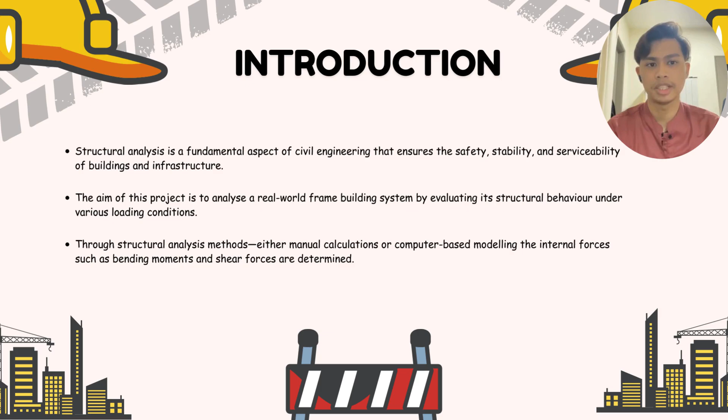For introduction, structural analysis is a fundamental aspect of civil engineering that ensures the safety, stability, and serviceability of buildings and infrastructure. The aim of this project is to analyze a real-world frame building system by evaluating its structural behavior under various loading conditions. Through structural analysis methods, either manual calculation or computer-based modeling, the internal forces such as bending moments and shear forces are determined.

I will continue explaining the objectives for our project. There are four objectives. First is to identify and calculate various types of loads acting on the structure, such as dead load, live load, and lastly environmental load.

Number two, developing a simplified schematic drawing to represent the structure layout, support types, and member geometry. Number three is performing structural analysis to determine internal forces, including maximum bending moments and shear force. Lastly is computing the maximum bending and shear stress based on the internal force results.

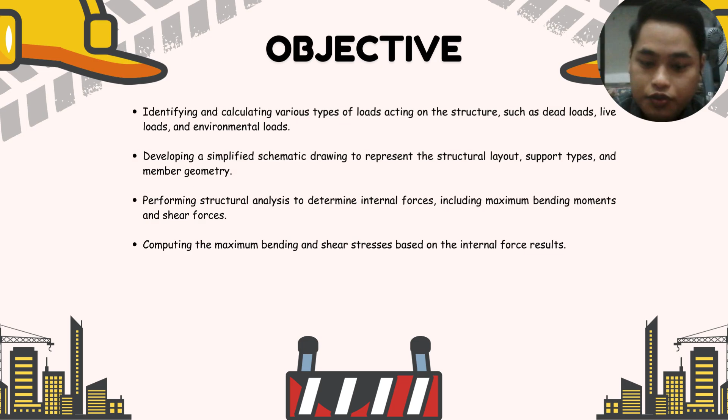Assalamualaikum. I will explain about the building description. The building that we chose is ARKED UTHM, a primary multifunctional commercial and social hub. It is located in Universiti Tun Hussein Onn Malaysia campus in Parit Raja, Johor.

The purpose and location of this building is strategically positioned near residential and academic areas, serving students, staff, and visitors with retail shops, food court, and offices. The structure consists of a 2 to 3 story reinforced concrete frame building designed for dense usage.

The architecture utilizes a minimalist modern style and incorporates natural ventilation, louvered windows, and shaded walkways to manage the tropical climate. The layout prioritizes pedestrian flow and comfort through wide staircases, covered corridors, and dedicated parking.

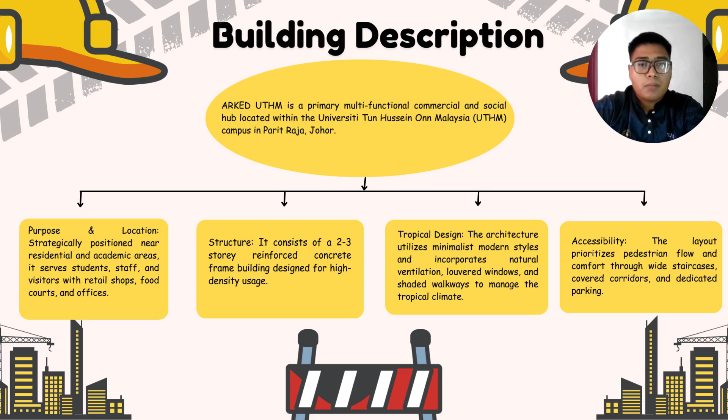Based on the diagram, I have decided to choose beam 1 size. The length of the beam is 4 meters, the height of the beam is 0.3 meters, and the width of the beam is 0.2 meters.

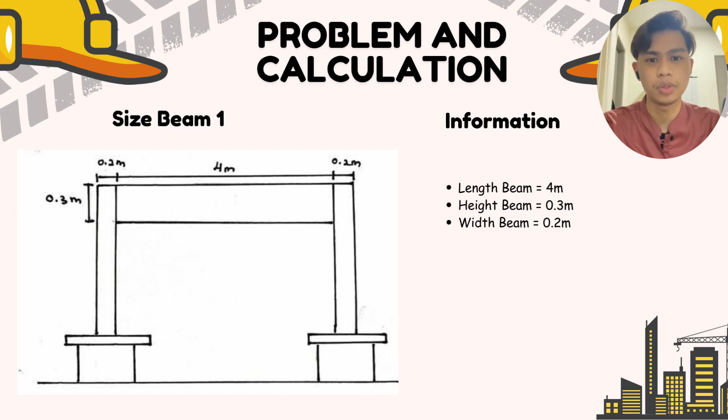Based on that beam, there are 3 load conditions given. The first is the dead load. As you can see, the dead load has 4 components: RC roof slab equals 5.0 kN per meter square, waterproofing which is 0.4, ceiling and services which is 0.3, and finishes and M&E allowance is 0.4. The total of the dead load is 6.1 kN per meter square.

Secondly, the live load is for a non-accessible roof, so the total load is only 0.4 kN per meter square. This is because the beams on top of the roof are used only for services.

And then finally we have the environmental load. There are 2 loads, which are rain and wind load. Both of them are 0.75 and 0.25, equal to 1.05 kN per meter square. So we total up the dead load, live load, and environmental load, and we get 7.5 kN per meter square.

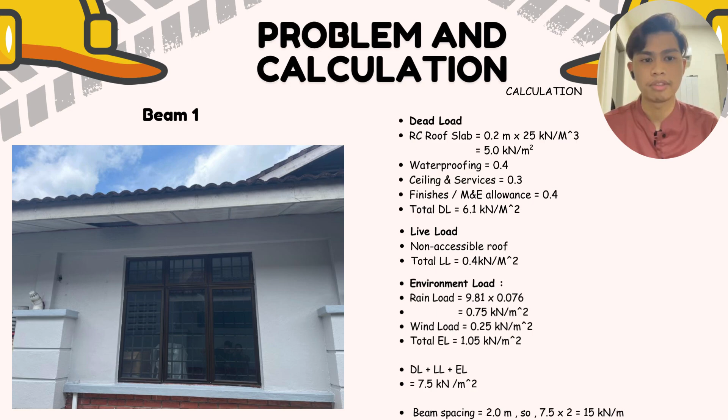This is because the beam spacing is 2.0 meters, so the total of the UDL that we get is 15 kilonewtons per meter.

Firstly, we need to draw a schematic drawing as you can see in the pictures above. After that, we calculate the support reactions.

I choose sum of moments at A equals 0, so 15 kilonewtons per meter multiplied by 4 and multiplied by 4 over 2, and then RBY at distance 4 meters equals 0. That is the equation. After that, we get 120 minus RBY times 4 equals 0, and summing it up, RBY equals 30 kilonewtons.

Secondly, we need to get the forces at Fy to get RAY. So we know RBY is 30 kilonewtons. So what we're going to do is RAY plus RBY, which is 30, minus 15 multiplied by 4 because of the UDL and the distance, equals 0. So RAY minus 30 equals 0, and we get RAY equals 30 kilonewtons.

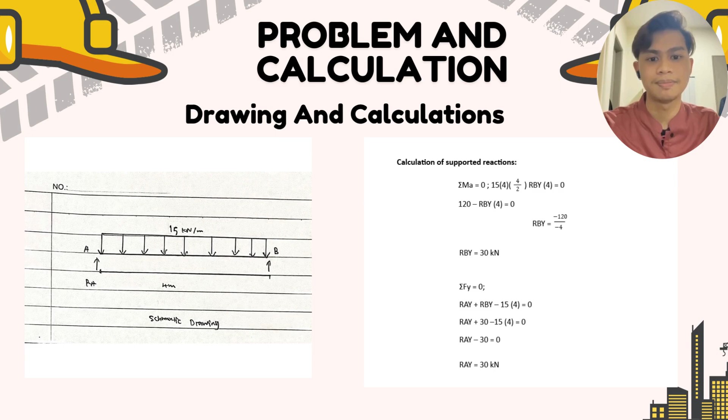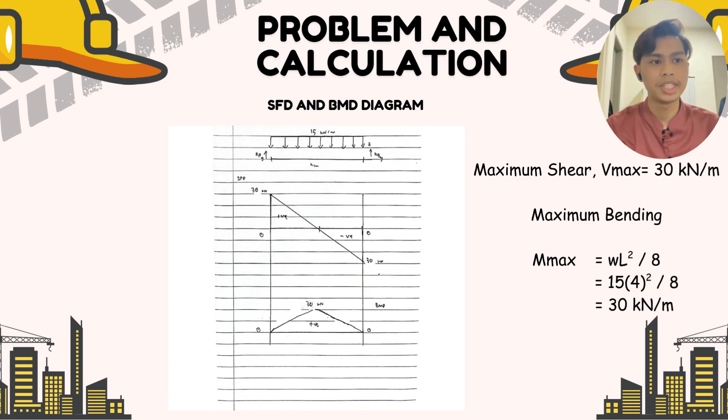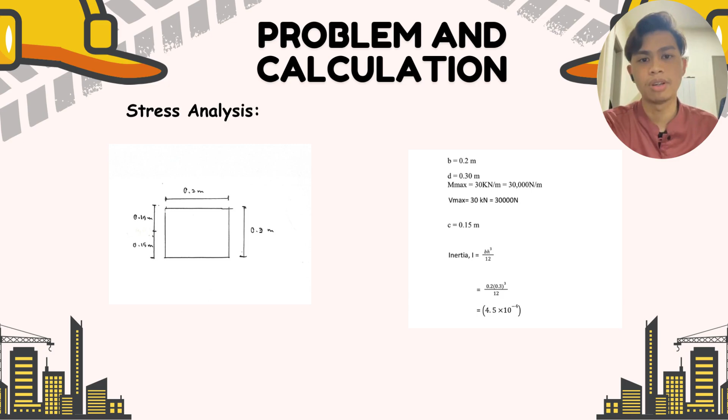After that, we need to sketch a diagram for bending stress distribution. Based on the pictures above, it goes like this. So how do we determine the maximum bending stress? We use the formula MC over I. M equals to our moment, which is 30,000 newtons, multiplied by the C, which is 0.15, divided by the inertia that we just got, which is 4.5 multiplied by 10 to the power of negative 4. And then the value we get is 10 multiplied by 10 to the power of 6 MPa.

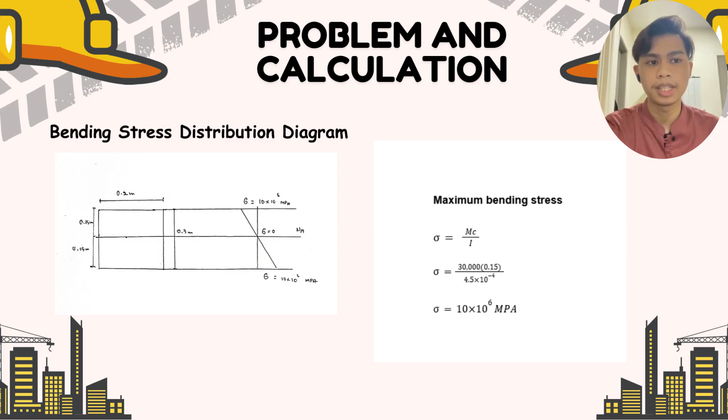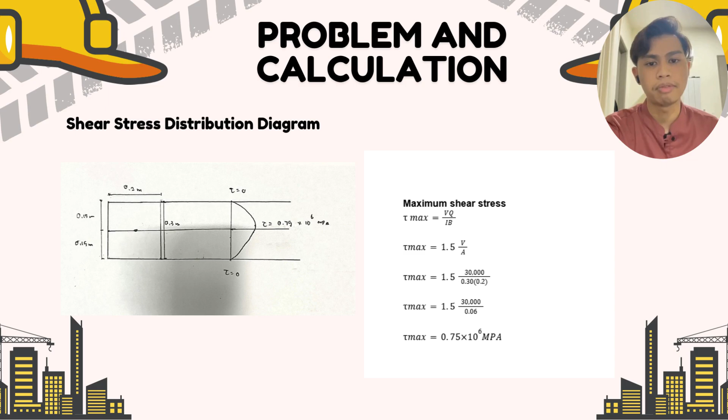Then we also need to sketch a diagram for shear stress distribution. How do we get the tau max for maximum shear stress? The formula is VQ over IB. For tau max we can also use 1.5 V over A. So for the tau max, 1.5 multiplied by 30,000 newtons over area, which is 0.3 multiplied by 0.2. And then we just insert the calculations, and the result we got is 0.75 multiplied by 10 to the power of 6 MPa.

Last but not least, we need to calculate the maximum deflection of the beam. The formula given is 5WL to the power of 4 divided by 384EI. The 5, and then we insert the 15,000, and then multiply by the length of the beam, which is 4, to the power of 4, and then divided by 384E. E is given for the concrete beam, which is 25 multiplied by 10 to the power of 9, and then the I, the inertia, is 4.5 multiplied by 10 to the power of negative 4, and the result we got is 0.004444 meters, and we convert it into millimeters, which is 4.44 millimeters, which is way lower than 11 millimeters.

Why do I say way lower than 11 millimeters? Because for me, the strength of the structure of the building is very good, because if the value that we get exceeds 11 millimeters, then with the maximum deflection of the beam we can see the crack of the beam.

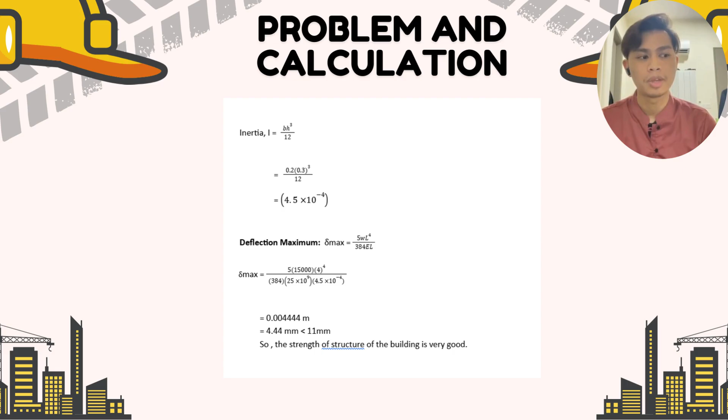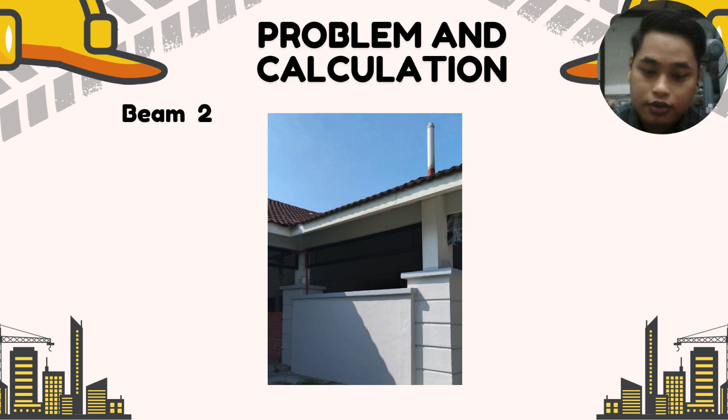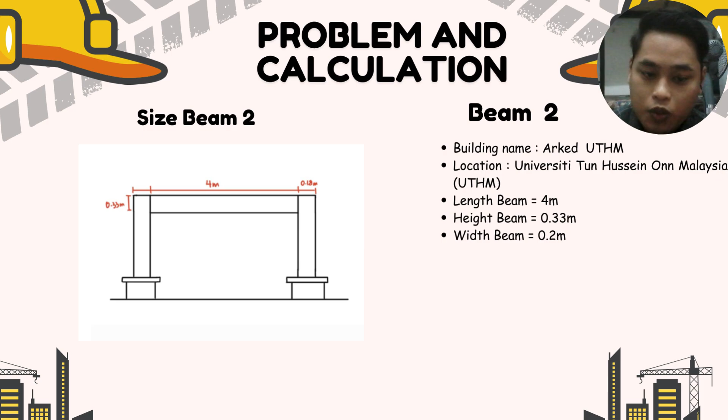This is an image of the beam that I have selected at Arked UTHM to calculate. Okay, this is the size of the beam that I have chosen. The length of the beam is 4 meters. Height of the beam is 0.33 meters. Width of beam is 0.2 meters.

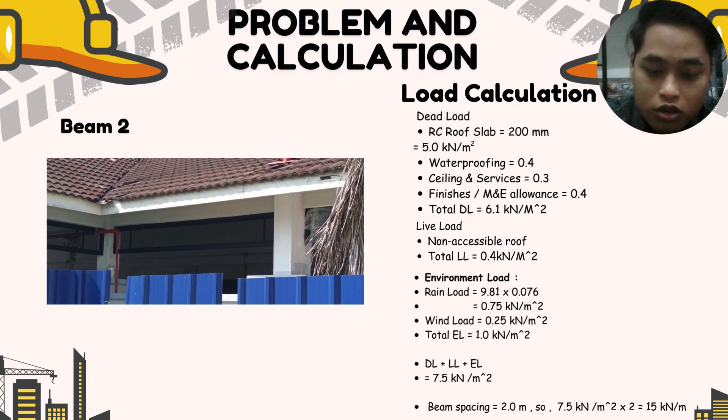Okay, this is the load calculation for my beam. So the dead load total is 6.1 kilonewton per meter square. Live load total is 0.4 kilonewton per meter square. Environmental load total is 1.0 kilonewton per meter square. So after that, I add dead load plus live load plus environmental load. So I get 7.5 kilonewton per meter square. The beam spacing is 2. So 7.5 kilonewton per meter square, we multiply by 2, and then we get 15 kilonewton per meter for beam UDL, uniformly distributed load for my beam.

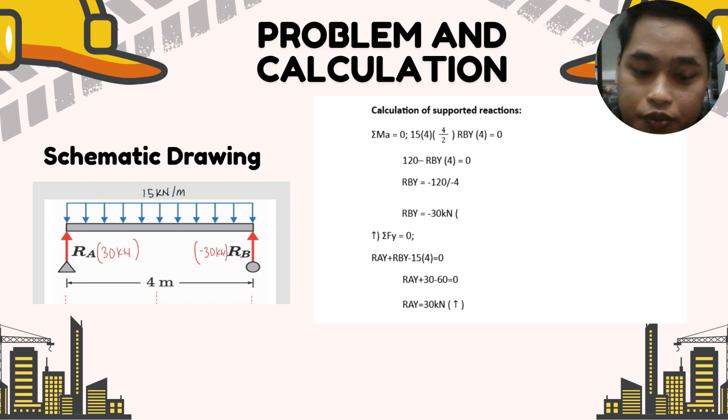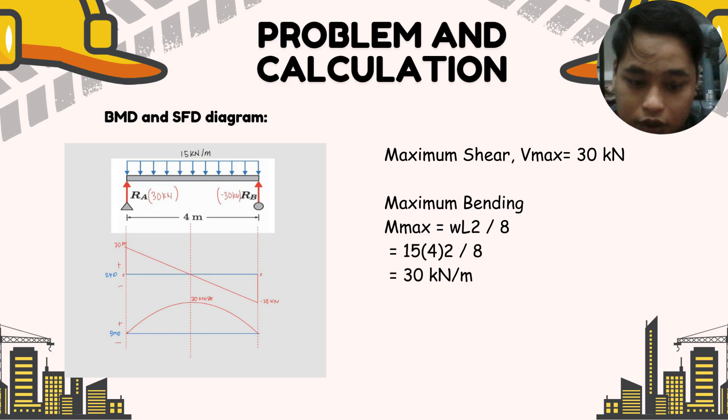This is the calculation for stress analysis. My beam is a rectangle beam. So the base is 0.18 meter. The depth is 0.33 meter. For the Mmax is 30 kilonewton per meter. We convert to Newton per meter is 30,000 Newton per meter. Vmax 30 kilonewton, we convert to Newton, 30,000 Newton.

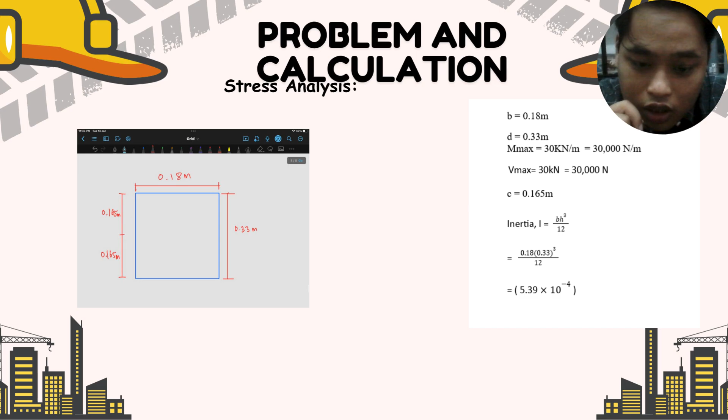And for C, the depth 0.33 meters, we divide by 2, and then we get the C 0.165 meter. For the inertia Ixx is 5.39 multiplied by 10 power of negative 4.

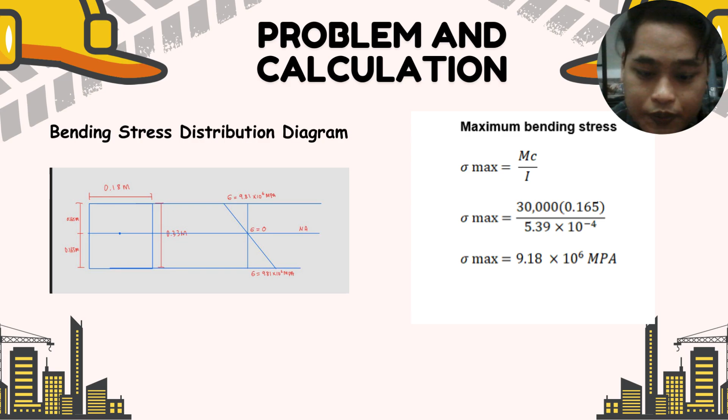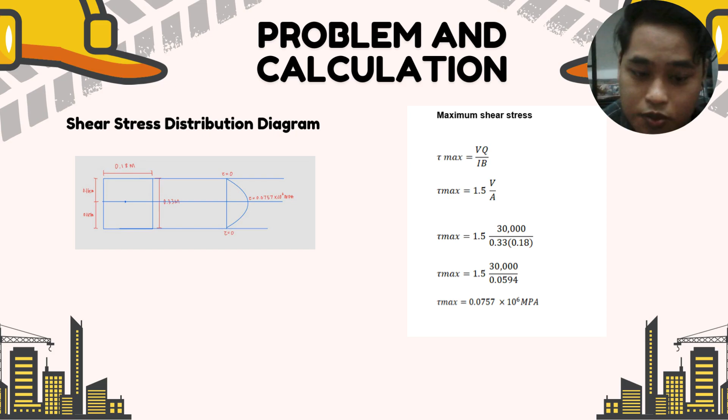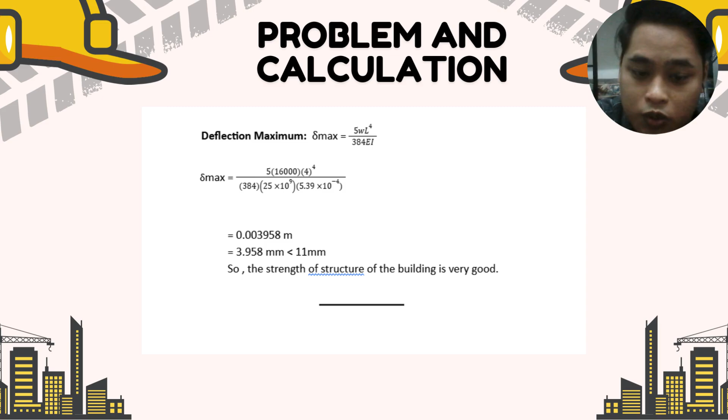Okay, this is the calculation for deflection maximum for my beam. So I have get 0.003958 meters. So I convert to millimeters. So I get 3.958 millimeters, below 11 millimeters. So the strength of the structure of the building is very good.

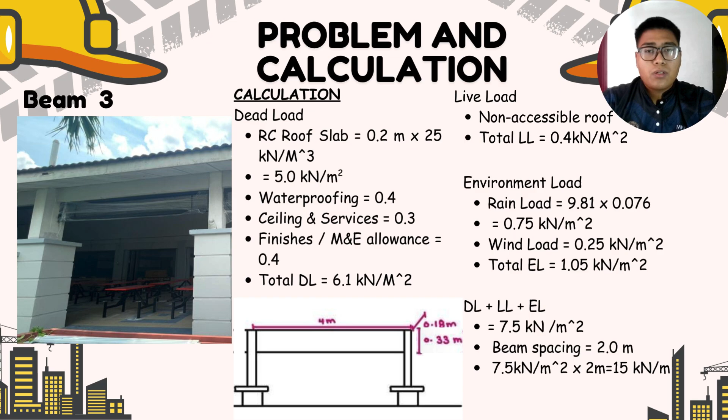For the live load, the roof is non-accessible, so I assume for the services and things, the total live load equal to 0.4 kilonewton per meter square. For the environmental load, the rain load I took it as 0.75 and the wind load 0.25. So the total environmental load is 1.05 kilonewton per meter square. Thus, the total load for the load calculation is 15 kilonewton per meter.

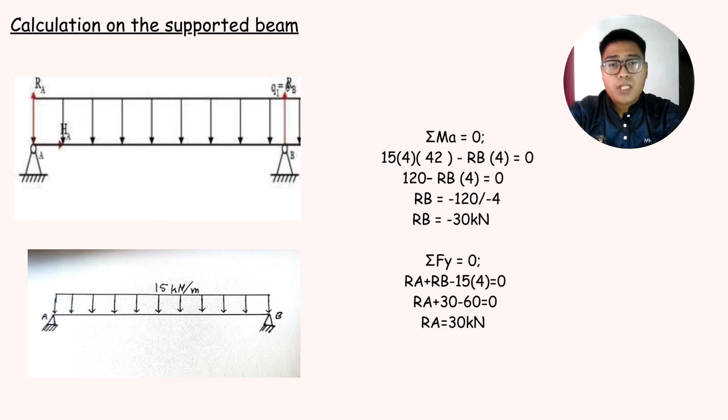For the RA, I assume Fy equal to 0. RA plus RB minus 15 times 4 equal to 0. Thus RA equal to 30 kilonewton. So for the shear force diagram, the maximum shear that we get is 30 kilonewton based on the diagram. So as we can see on the diagram, both A and B pin got 30 kilonewton force acting on it.

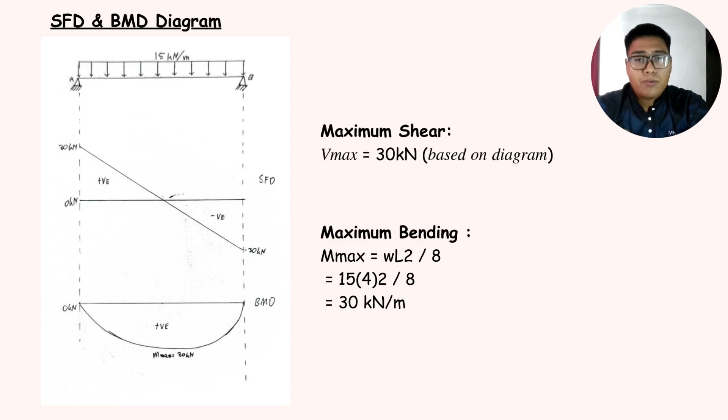For the maximum bending that we got on this beam, the formula for the maximum bending Mmax is equal to WL squared over 8. So the weight that we get is 15. The length of the beam is 4, squared. Then we divide it by 8, so we get 30 kilonewton meter.

For the bending stress analysis, the cross-section of the beam is 0.33 meters for the height. For the width is 0.18 meters. And lastly, the y, which is the cross-sectional length, is 0.165. For the inertia I, the formula is BH cubed over 12. Thus, we get 5.39 times 10 power of negative 3 meters power of 4.

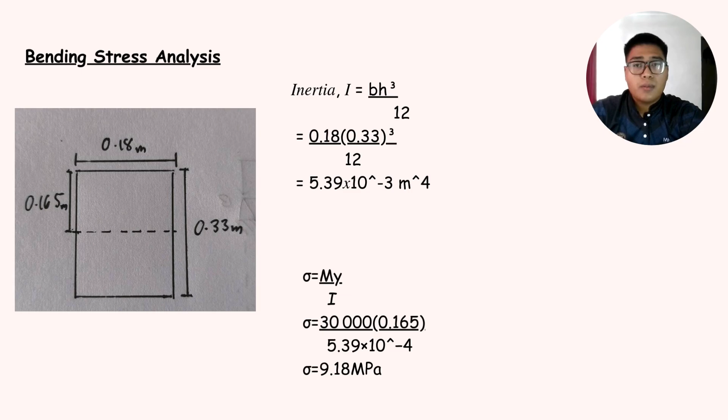For the bending stress, the formula is My over I. So we put the calculation in that. Thus, we get the bending stress is equal to 9.18 megapascal. For the deflection analysis, the formula is 5WL power of 4 over 384EI. So I assume that E is equal to 25 gigapascal as a concrete beam.

So from the calculations, we got that the max deflection is 3.7 millimeters. We know that the allowed deflection is 11 millimeters, and the max deflection that we get on this beam is 3.7 millimeters. Thus, 3.7 millimeters is less than 11 millimeters. Deflection max is less than deflection allowed. Thus, the strength of this beam structure is good.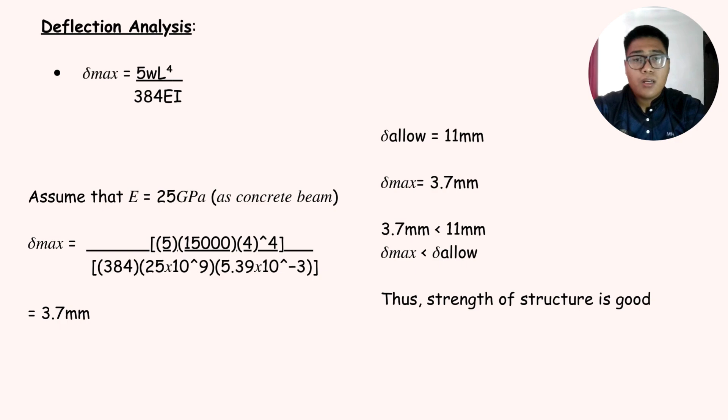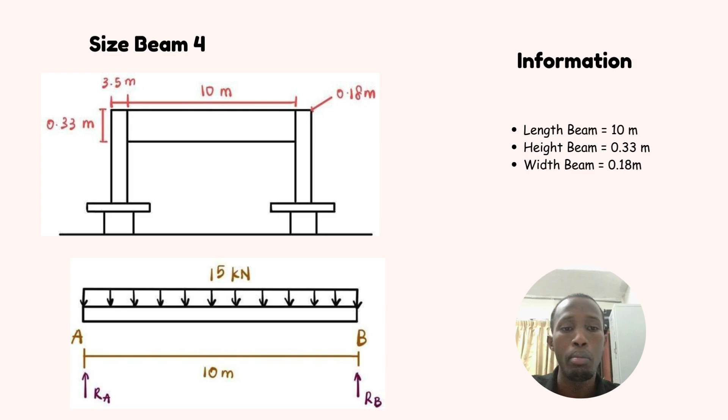I would like to present my beam. My beam is beam 4. This is beam 4, the sizing beam 4 information. We have length of beam 10 meters, height of beam 0.33 meter, and width of beam 0.18 meter. This is how to calculate the supporting beam.

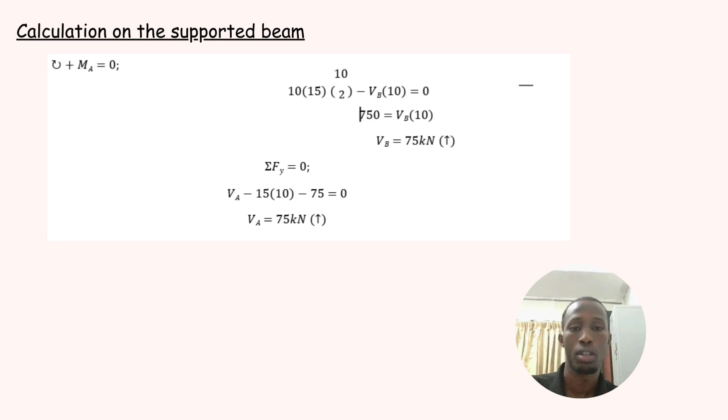First, we have to calculate VB. We get 75 kilonewton up, and we have to calculate VA. We get 75 also up. After that, we have to calculate the shear force diagram and then bending moment. The first diagram is the free body diagram. The second one is shear force, and the last one is bending moment.

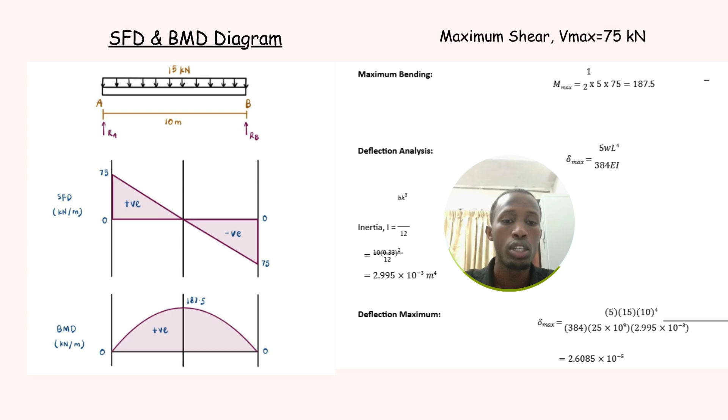After that, we have to calculate maximum shear. Vmax we get 75 kilonewton, and we have to calculate maximum bending moment. We get 187.5, and after that we have to calculate delta max. Delta max we get 2.6085 times 10 to the negative 5.

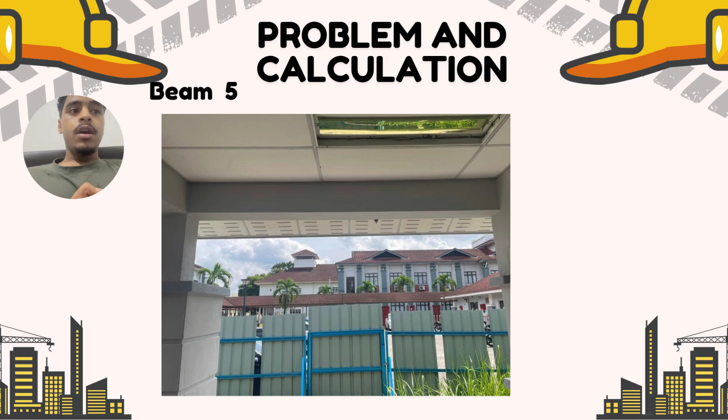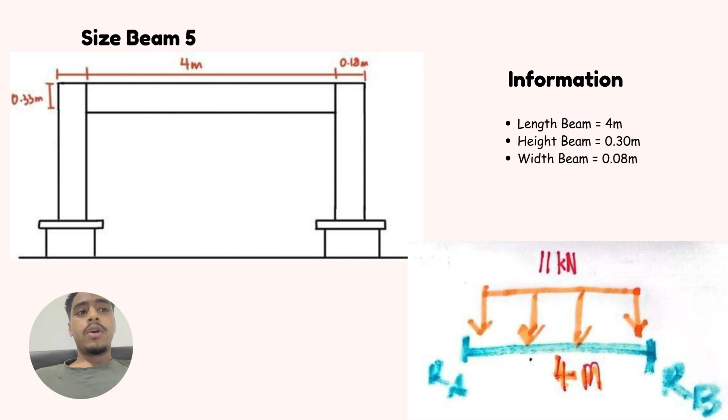This slide shows us the structural analysis of a simply supported beam with a span of 4 meters. As you can see here, this is the size of beam 5. The dimension information: the length is 4 meters and the height is 0.30 meter, and width of beam is 0.08. Right now we will talk about calculation on the support beam. This calculation has 3 types of load on the beam.

The first one we will talk about is dead load. The dead load we calculate and find is equal to 6.2 kilonewton meter, and the live load we calculate and find 0.4 kilonewton meter, and also we get the environmental load. The first thing, rain load is 9.81 multiplied by 0.076, equal to 0.75 kilonewton meter, and we calculate wind load is 0.3 kilonewton meter, and the total environmental load, so we get 1.05 kilonewton meter. So we calculate all this and find the total is 7.5 kilonewton meter.

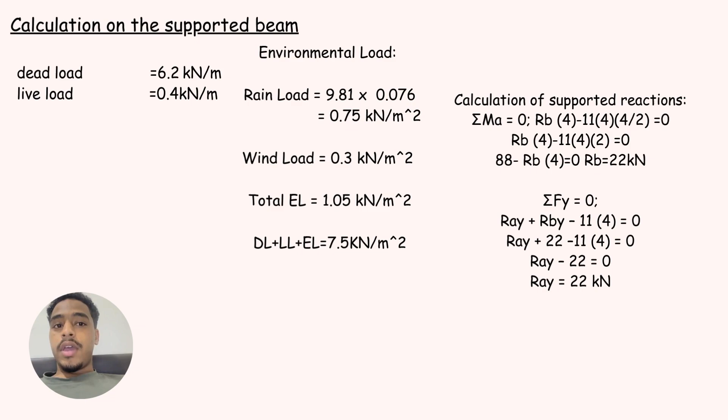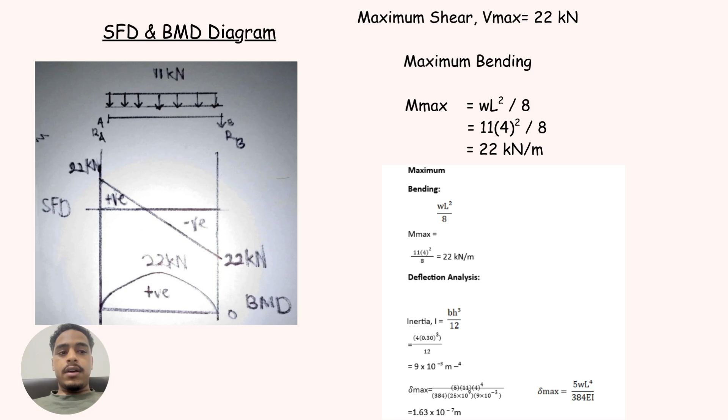After this we're talking about a deflection analysis example. In this part of the analysis, we check the deflection of the beam, which means how much the beam bends under the applied load. The first thing we calculate is the moment of inertia. Using some formula, for I we get 9 times 10 to the minus 3 m to the 4. After this we calculate the maximum deflection. Using some formula we get 1.63 times 10 to the minus 7 meter, and this is the maximum deflection.